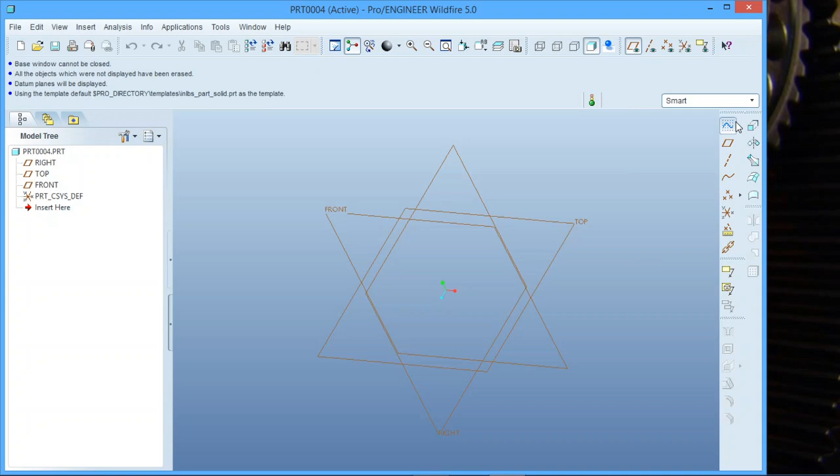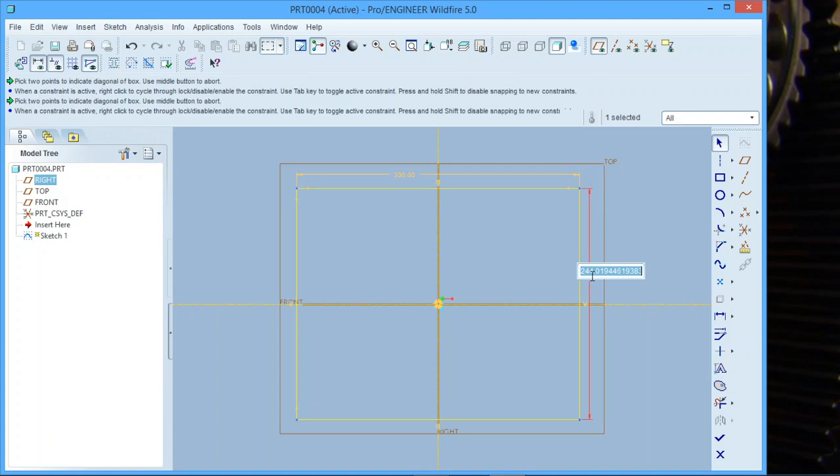Okay, so before we can do our sheet metal, we need to do a standard part. Before we can convert to sheet metal, we have to sketch and draw our solid part first. So all we're going to do is draw a block. We're going to say 300 by 300. Okay, we're going to say extrude. Then we're going to say 30 mils. Okay, we're going to say okay.

Now, to convert from solid to sheet metal, all we have to do is go to application, click sheet metal, and now you've got two options. If it's something like this, you would go shell because we're going to turn it into a box. But if you had gone driving surface, it will take this as a flat plate. So you can choose, even if it is bent in the whole story, you can use driving surface as long as it's already shelled.

But if you need to shell it still, then you're going to have to use the shell feature. If you use driving surface, it's going to take it as already bent in the form it needs to be. You can add bends later, but that's the difference between the two: the one that needs to be shelled or is already in sheet metal form, and then shell, where you're obviously going to shell the product into a sheet metal form.

So for instance, if I say driving surface now and I selected the top here, it's going to say it's a 30 mil thick plate. Okay, but if I go shell...

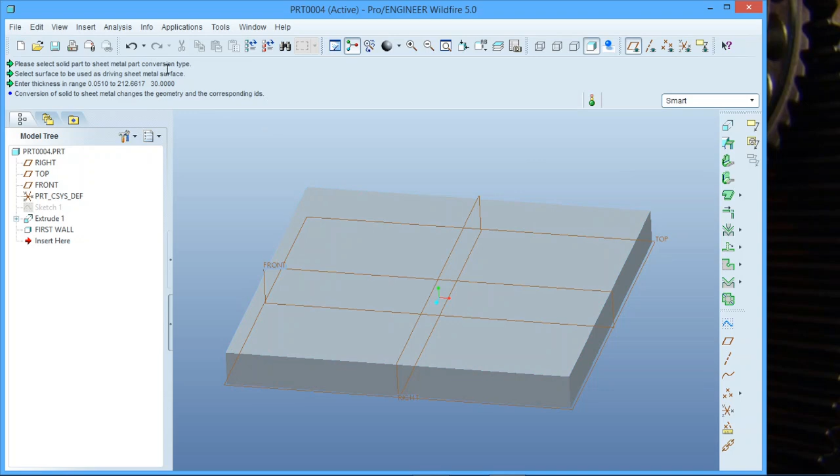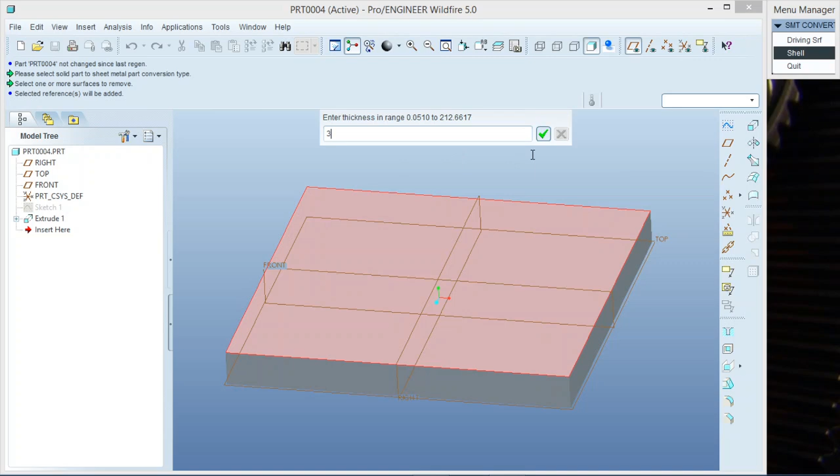Let's just undo this, and we're going to say application sheet metal. Now if you go shell and I click on any one of these surfaces and say okay, done, it'll ask me for a thickness. So say we make it 3 millimeters thick, and I say okay, there's your box.

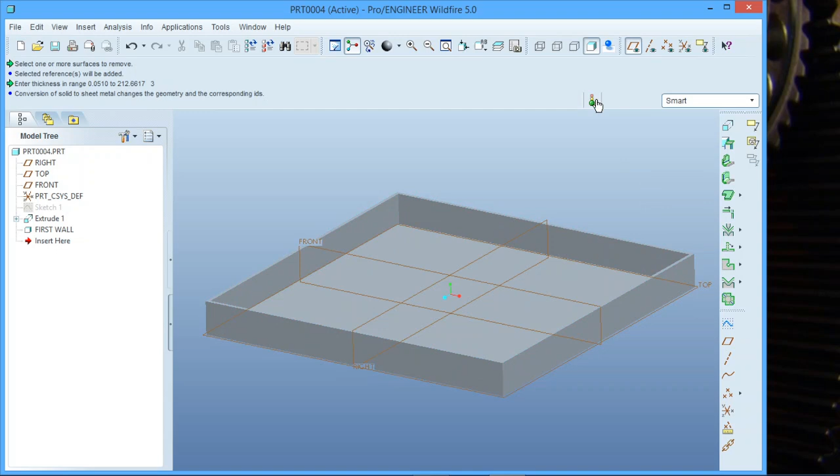Okay, now as you see, your menus have changed now because now you're in sheet metal. So very simple. But now the only thing you need to know is, now that you're in sheet metal and you have your box, we need to convert these edges to bends, and you're going to need to rip the edges.

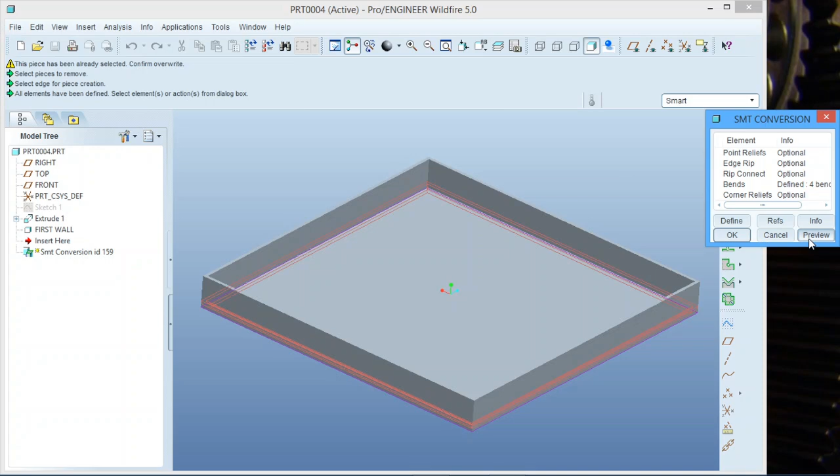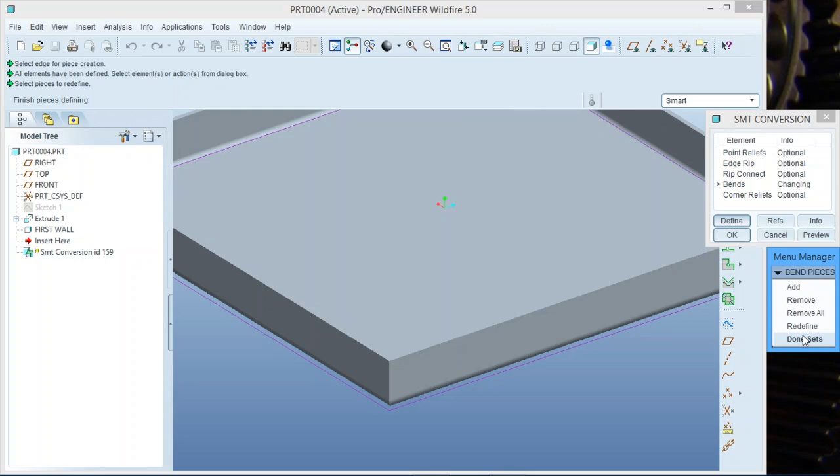We're going to say done. We're going to say preview so we can see. Okay, and we can go back to our bends and say define. There are your bends, those are the 4 edges that you selected. You can pick per piece, you can select all, and then we say done. We say done sets because we don't want to add, we don't want to remove, we're happy. Now we say okay because now we're happy with our bends.

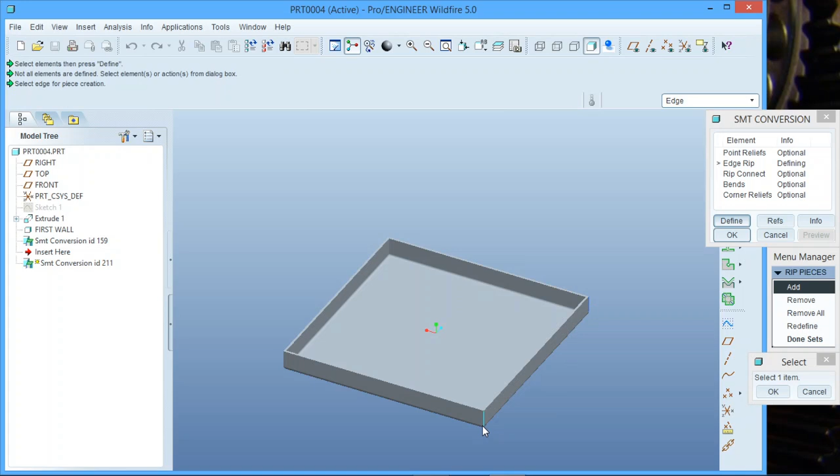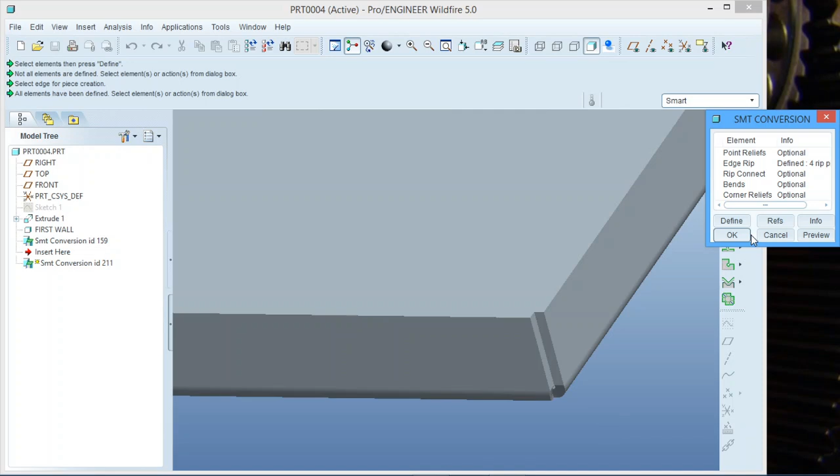But now I can't flatten this, because why? Because these edges are still solid. So what do we do? We go back to our conversion over here and we say edge rip and say define, and again we're going to click on that edge, click on that edge, click on this one, and select every single one that needs to be broken apart basically. We're going to select those. Then we say okay, we say done sets, say preview, we'll show you like that, and we say okay.

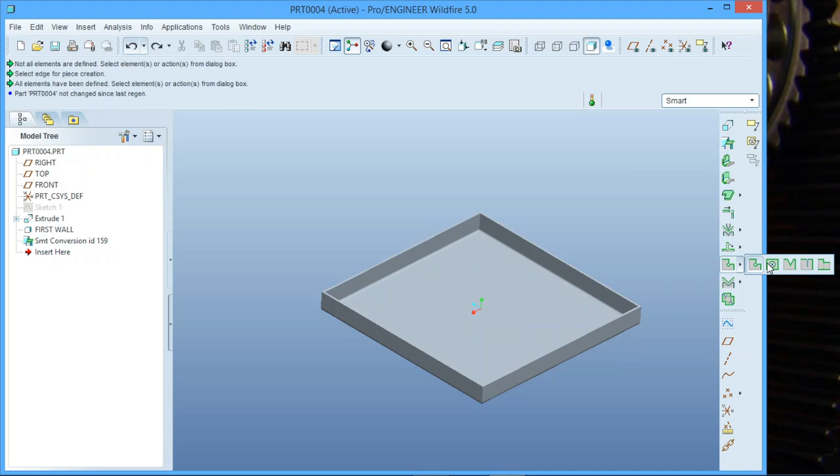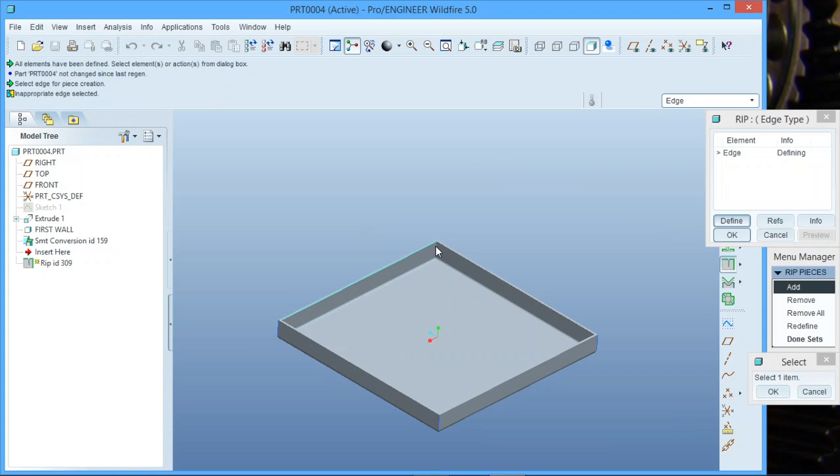Simple. Now if you want to flatten this, that's very easy. But if you didn't want to use the conversion over there, you can also, if you go over here to your relief tab, go rip, then say regular rip, edge rip sorry, say done. We can select our edges - no, not that one, that one, that one, and that one. Okay, now we've got our edges, we say okay, we say done, say preview, and we say okay.

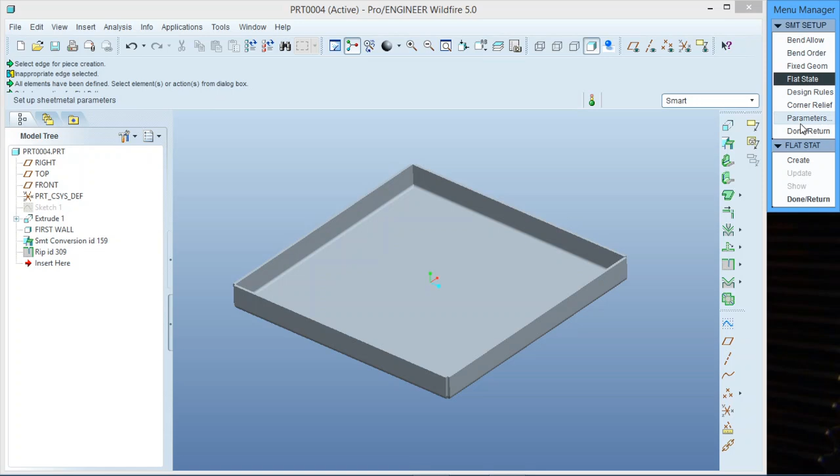Very simple. So look, if you want to see what it looks like flat, all you do is edit, go to setup, go to flat state over here, go create, say flat. Now it's asking you, is it fully formed or is it flattened in the state that it's in now? So obviously it's fully formed, it's not fully flat. So if it was fully flat, we wouldn't be in this menu. So we're going to say fully formed.

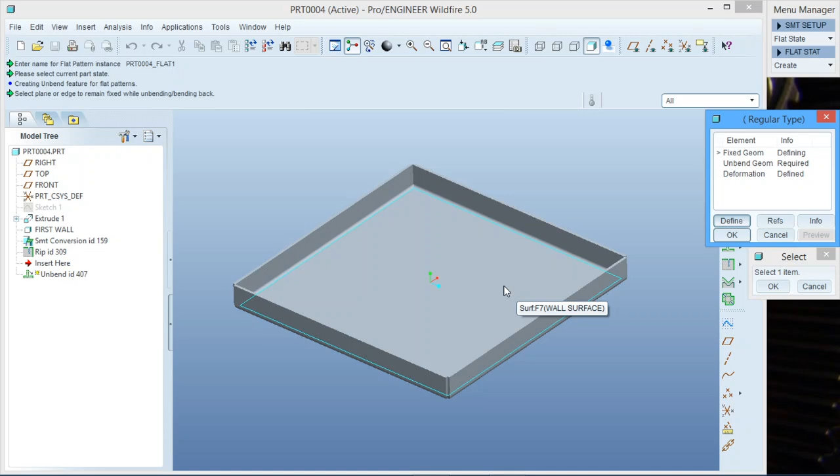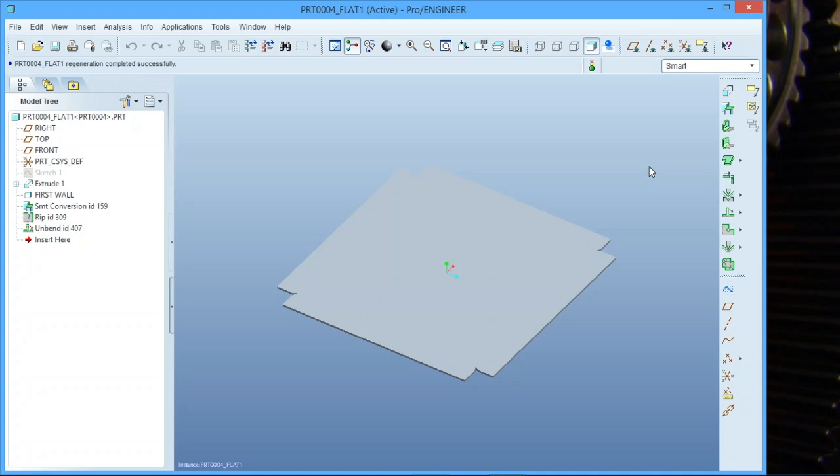Now it's asking you for fixed geometry - what part of this needs to stay still and which parts need to go flat. So for fixed geometry, the part that's not going to move, we're going to select the centerpiece here. And we're going to say preview. And then it'll give you like that. And if we say okay, if we now go to show over here, click on there, and there is your flat state. Okay, very easy, very simple, and necessary.

Well, I hope you guys enjoyed this quick little video. This is everything you need to know to convert from a solid to a sheet metal part. Follow the rest of the videos. We will be doing parts of the sheet metal process in every video.